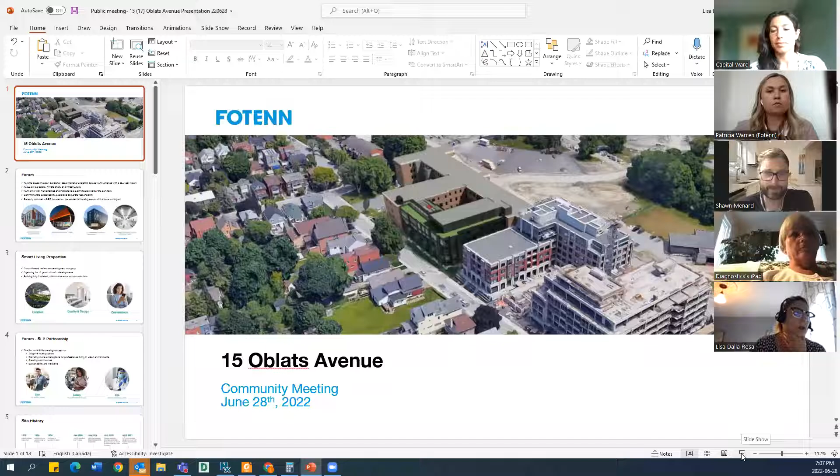Good evening, and thank you for that, Councillor Menard. We're happy to be here today to present the proposal for the reuse and addition of the property at 15 Oblats Avenue. I'm Lisa Dalla Rosa with Fotenn Planning and Design, and joining me is my colleague Patricia Warren. We're consulting planners on the file, and we'll be working with our clients, Forum and Smart Living Properties, on the required development application approvals for this.

As the councillor indicated, prior to tonight we've had meetings already on this project. We had a formal pre-consultation meeting with the city, and we've met with the councillor and members of the community association. Those discussions have been very beneficial in shaping where we are at today, and we look forward to continued collaboration and welcome the opportunity for the conversation with you here tonight.

Also joining me is Dayna Gilbert from Forum, who I'm going to pass it over to now so she can provide some insight into who Forum and SLP are and the type of rental accommodations they're introducing here.

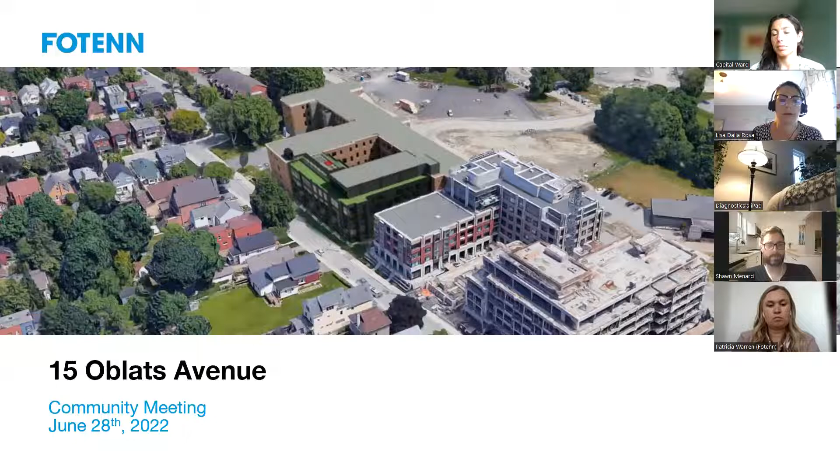Hi everyone, for those of you who haven't met me before, I'm Dayna Gilbert, Vice President of Development here. I've received comments as well, so please know, here's a face to a name. To introduce Forum: Forum is a Toronto-based investor, developer, asset manager operating across all of North America. We have a 25-year history with a focus on real estate, private equity, and infrastructure, while partnering with various municipalities and institutions as a significant part of our company.

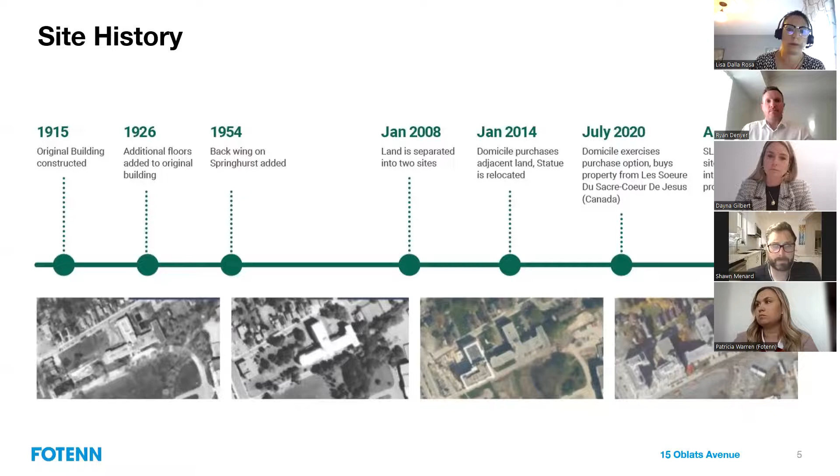The property's heritage values have been considered by the Built Heritage Committee. The final recommendation was not to designate the building, however it did require that any redevelopment recognize the Sisters of the Sacred Heart of Jesus and their important role in the community for over 100 years. Their work focused on education, healthcare, and social services. Any redevelopment was also to retain the statue of the Blessed Virgin, which has been a fixture on this site for decades. It's moved around a bit, but it's still there.

I don't have to explain too much about this slide. We are all familiar with this site and its location within a 15-minute community, making it an ideal place for a development with this residential housing approach.

Before going into the different development options and potential of the site, it's important to understand the planning framework and the city's vision for these lands. The site is designated General Urban in the current Official Plan, and that designation permits a range and type of densities in housing, as well as a mix of other uses. It generally supports heights up to 4 stories. This proposal is consistent with that designation, which is being carried through into the new Official Plan. It's got a different title, but the characteristics of the designation are similar.

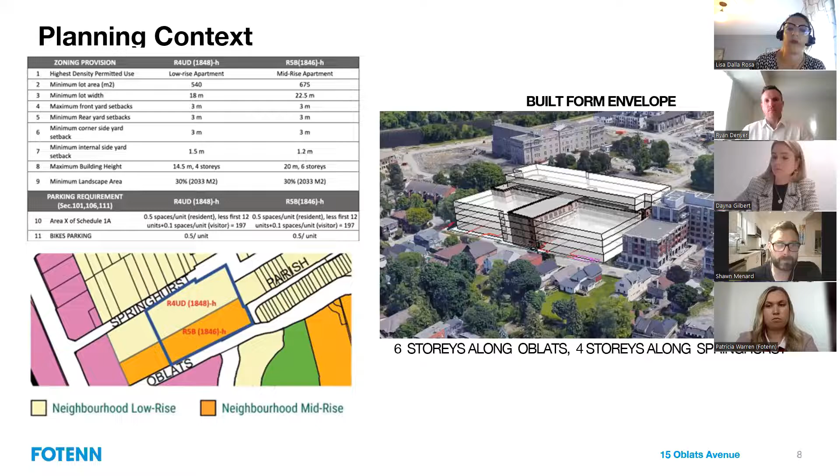Once we understood that, we were able to go into the different ideas for the site. I'm going to quickly go through the evolving options that we considered, discussed, and presented to the city.

Option 1 considered additional height facing Oblats, which could go up to 6 stories as per the secondary plan, wrapping around to a 4-story building along Springhurst. This saw the removal of the 1954 addition to the existing building.

Option 2 retained the entirety of the existing Oblats building, added 2 recessed floors to the top to maximize the permitted 6 stories, and added 2 additional wings while keeping the existing 1954 addition in the middle. From there, we refined that slightly, and in May had a pre-consultation.

That's the bigger picture with the color on the screen, a redevelopment that was 4 stories, containing approximately 339 units, a conversion of the existing building with 2 additional wings.

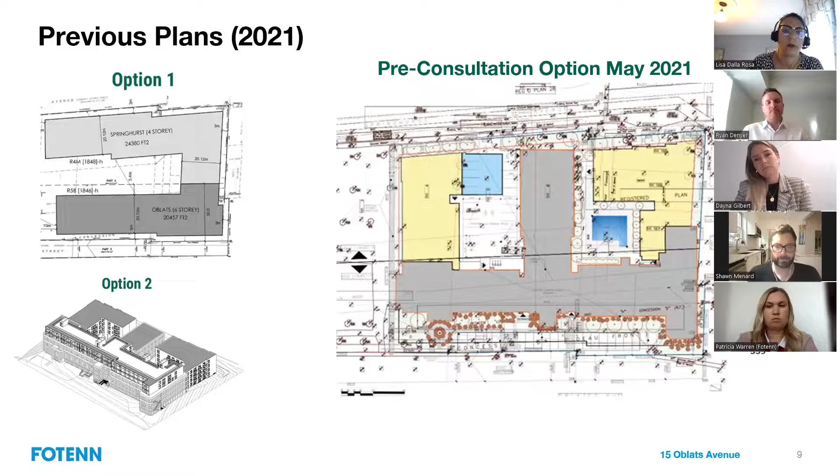After that pre-consultation, the team took some time, considered the staff comments and the community comments we heard from the community representatives who were there.

What's on the screen now is the revised plan that we presented back in March of 2022 - it seems so long ago, but that was this year. That's the one that was shared with the councillor and the Community Association Planning Committee.

The comments from the pre-consult highlighted a few changes that were needed, resulting in a scaled down building footprint that retained the mature trees in the northeast corner of the property by introducing a new public park that would be dedicated to the city.

The proposal retained the entire existing building, converting the internal areas to apartments and keeping only the western addition, resulting in approximately 284 units of mixed sizes.

Parking was limited to surface parking and set aside for visitors and short-term parking only. Bicycle parking is indoors, at a ratio of over 1 space per unit.

The co-living housing model requires ample amenity spaces, which have been accommodated indoors on all floors, along with a rooftop offering: an interior outdoor courtyard as well as an interior outdoor amenity space on top of the Oblats building. It was a 4-story profile, save and except that enclosed amenity space on the roof.

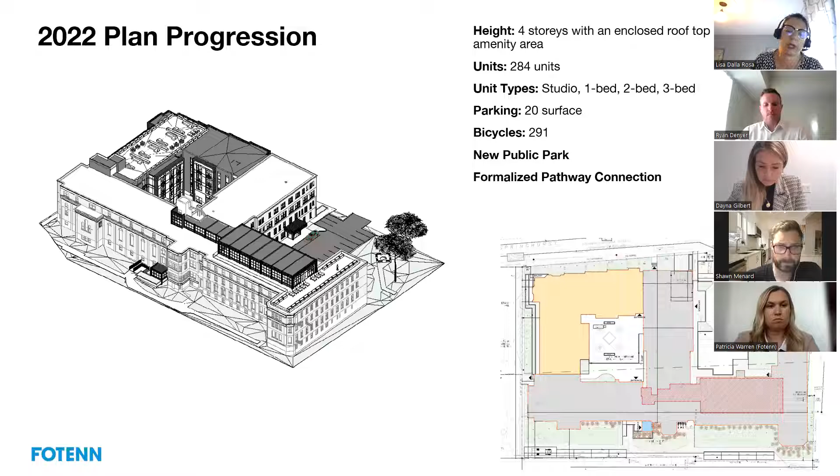Since presenting that last plan, as Dayna and the Councillor have indicated, there's been some comments coming in, and we wanted to highlight some of those to show that we are listening, and there are changes coming from those comments. These, plus all the comments we hear tonight and throughout the planning process, will help us shape this project.

What we're presenting here today is mainly a change to the rooftop amenity area. The enclosed space is now atop the new addition, where it can be constructed as part of the new building and doesn't distract from the heritage facade along Oblats.

It also screens the outdoor rooftop amenity area, which has moved to be parallel with Springhurst and pushed internally. The space surrounding this amenity area, close to the edge of the building, is landscaped and unaccessible - just landscaped area, with no programming happening in that skirt around the amenity space.

The remainder of the project stays the same as was presented in March: 284 units, 20 surface parking spaces, and the new public park.

As previously mentioned, parking will be limited to surface only and set aside for visitors and short term. Tenants will be aware that no parking is provided, and relying on street parking is risky, as there's no guarantee that an on-street spot will be available at all times.

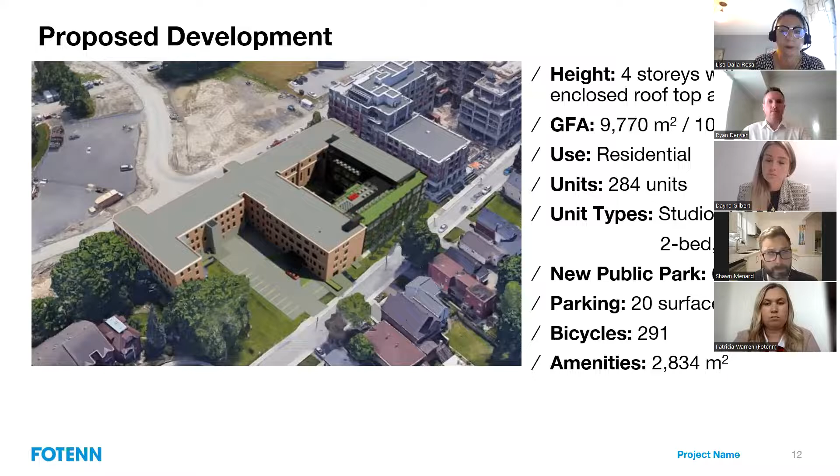So this is the site plan. I know it's hard to see with all the scale of it and the different colors, but I'm going to help walk you through it here.

On the site plan, you can better see the park, which is in the top right-hand corner outlined by that dark green. That's where we will allow for the retention of the two mature trees in that corner. It's also envisioned to be the space to commemorate the Sisters of the Sacred Heart of Jesus and relocate that statue. The red outline represents the footprint of the enclosed rooftop amenity space.

It's important to note that there are no windows on the west side, just a wall. Another thing to note is the pathway connection along the western edge that will provide that through-block connection from Springhurst to Oblats. This has been designed as a walkway due to the narrow passing space between the property line and the existing Oblats building. Bicyclists will be encouraged through different calming mechanisms to dismount and walk their bikes.

To use this connection. So speaking of the setbacks along that side, the new addition was designed to work towards a compliant setback. The required setback in the R4UD zone, where the addition is proposed, is currently 1.5 meters. This proposal has that addition at 3.4 meters to the main building wall.

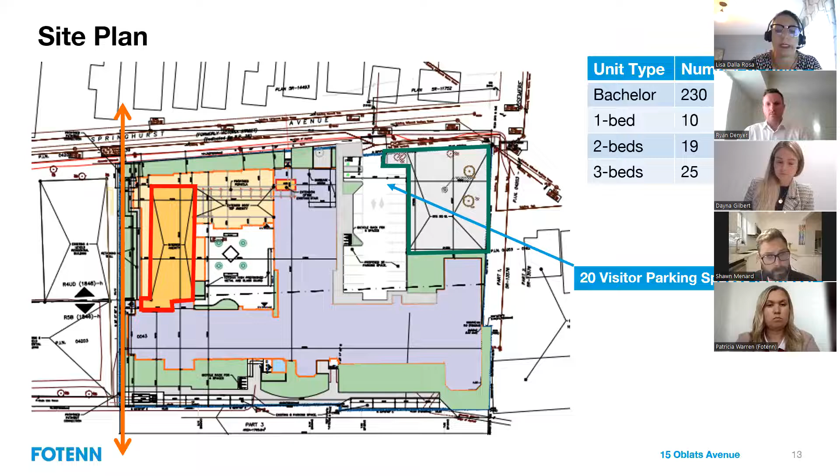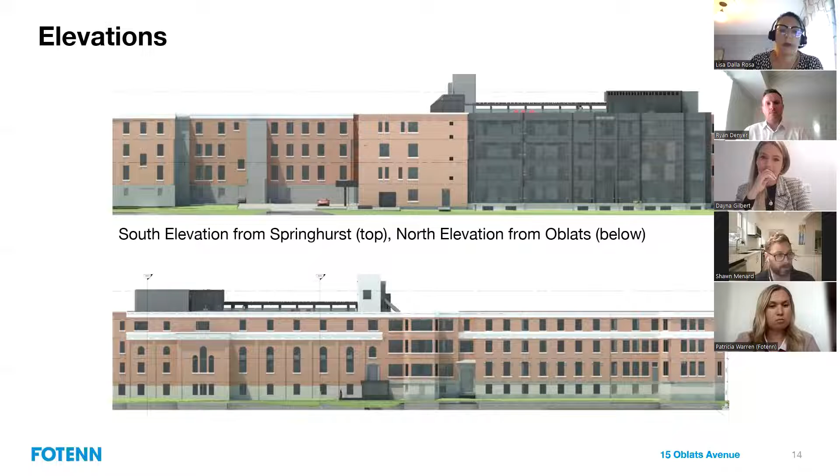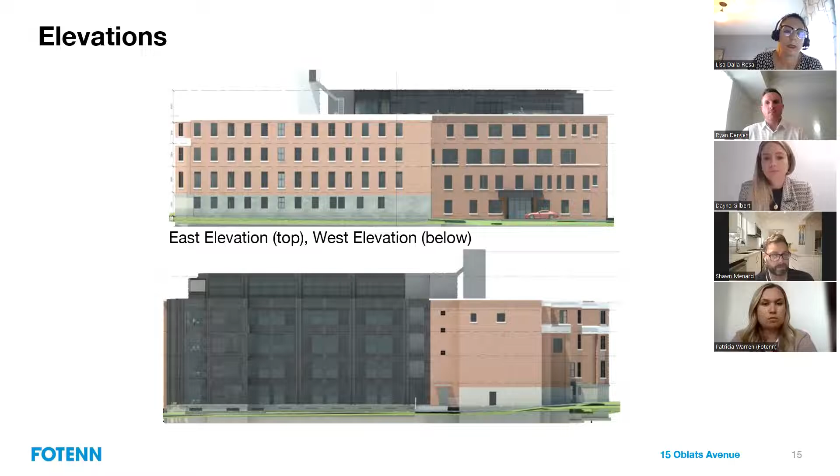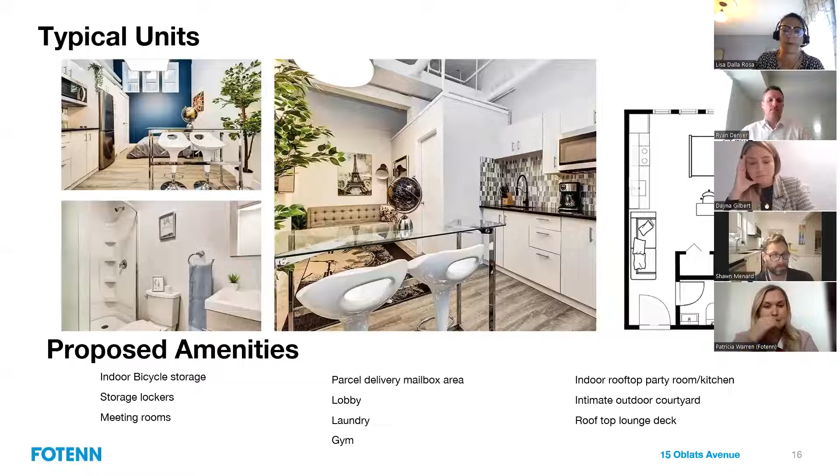Just to close off the building, I wanted to highlight that the units will be efficiently designed, as Ryan indicated, with quality finishes. The quality will extend to the ample shared amenity spaces, which are really the core of the co-living approach. There's a listing of what's being considered as the amenities that will be shared by the residents of this building.

So the applications required for this project will be a rezoning and site plan approval. Currently, the subject site is subject to a holding zone and has split zoning. The portion of the site facing Oblats is zoned R5B, permitting development up to 18 meters in height, and the remainder of the site is governed by the requirements of the R4UD zone.

So this rezoning will request one zone for the entirety of the property and include provisions unique to the approved site plan—things such as reducing the parking requirements, permissions for the enclosed rooftop amenity space, as well as recognizing the non-conforming setbacks of the existing building. Applications are expected to be submitted within the next few weeks.

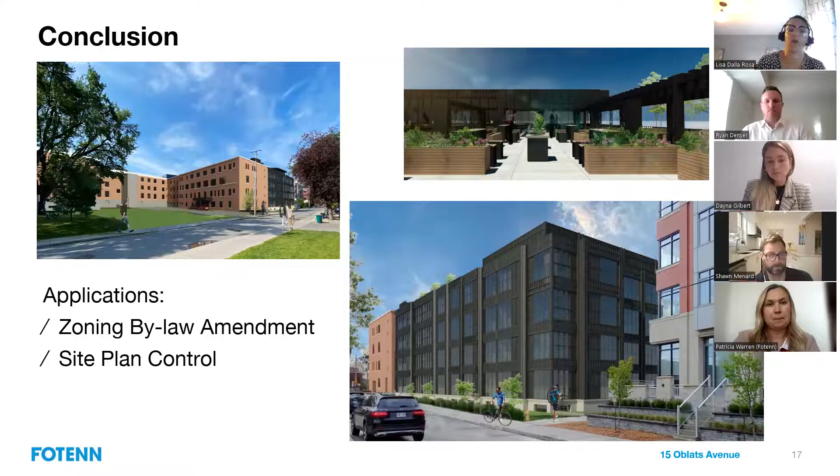Before I pass it off to Dayna, just to go over where we are in the process in a bit more detail, I want to highlight that this project, when complete, will be a great example of how to retain an existing building while also commemorating the Sisters of the Sacred Heart of Jesus with the new public park. The residents will have attainable housing in a place that is well situated and designed to accommodate all of their needs. So that concludes what I have to say.

With the time remaining, we're going to answer some questions, but we're going to pass it first off to Dayna just to give us a bit of a recap of where we're at and what's next.